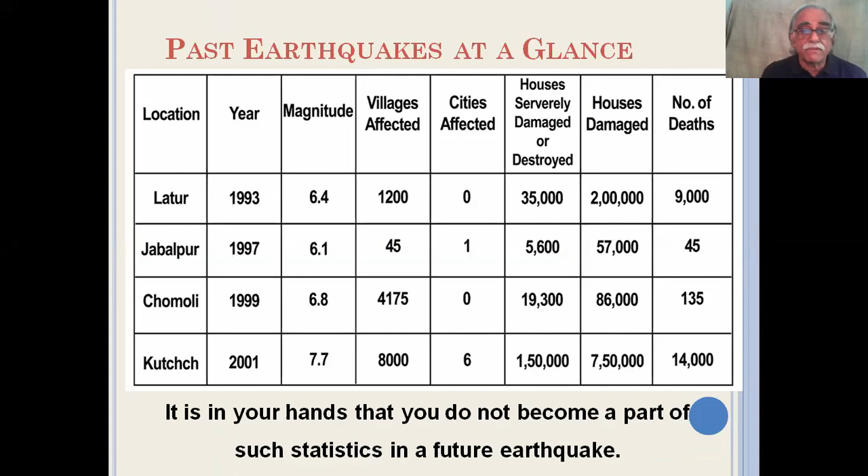These are examples of a few retrofitted schools. When we look at the numbers of damage, destruction, and deaths from the last several earthquakes and other disasters in the country, we find these numbers are huge, and they also mean that funds meant for development get transferred for reconstruction. Looking at the different hazards we have, such as seismic, high-speed wind, and flood, buildings which are vulnerable to a particular hazard are likely to suffer damage and pose danger to occupants if that hazard strikes.

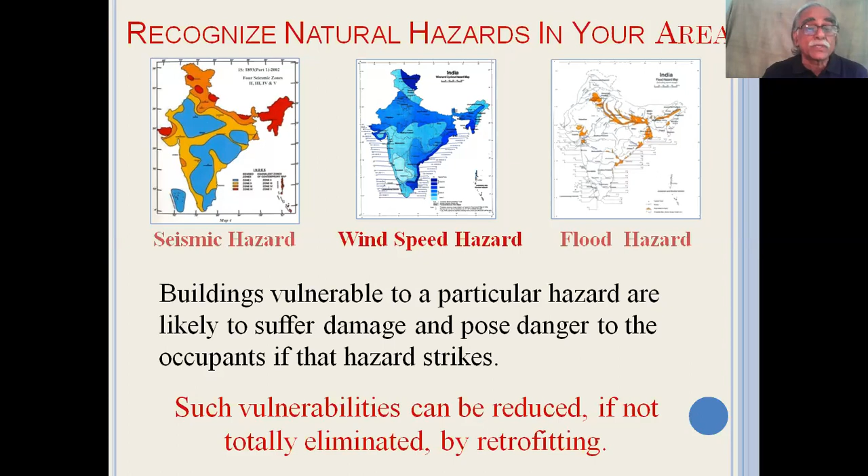Such vulnerabilities can be reduced, if not totally eliminated, by retrofitting. In India, we have lakhs of unengineered masonry and reinforced concrete frame buildings that are vulnerable, as they violate the basic rules of construction and lack disaster resisting features.

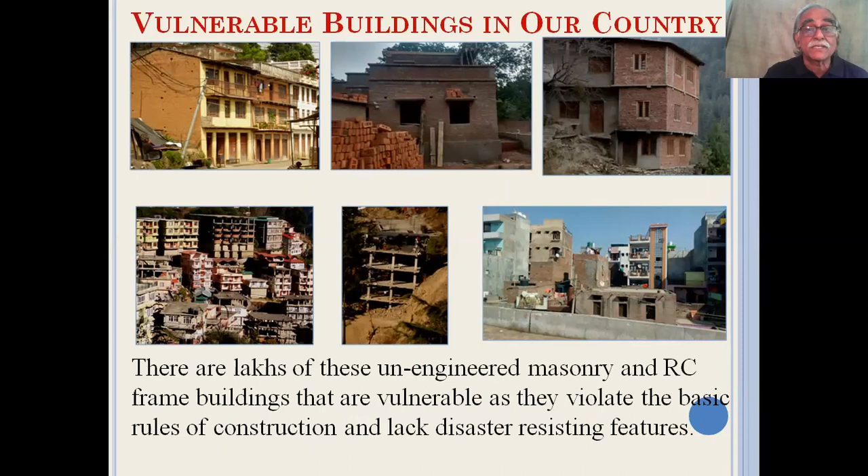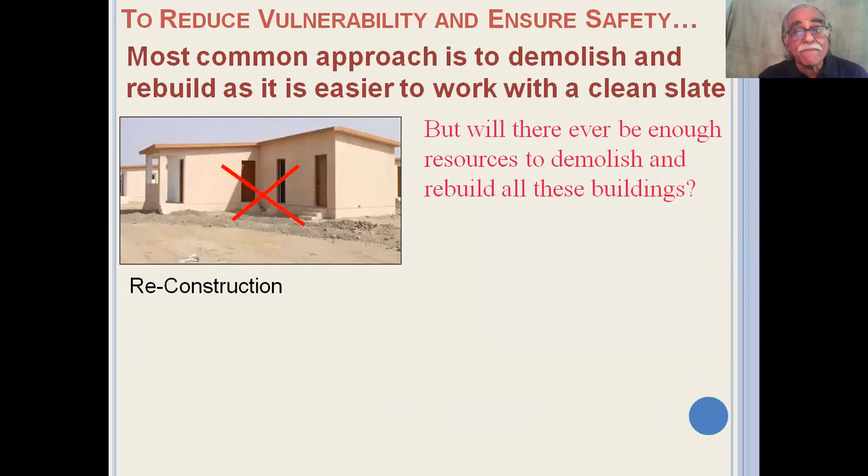To reduce vulnerability and ensure safety, the most common approach has been to demolish and rebuild, as it's easier to work with a clean slate. But the question is, will we ever have enough resources to demolish and rebuild all these buildings? Would it be better to restore and retrofit so that scarce resources can go much longer?

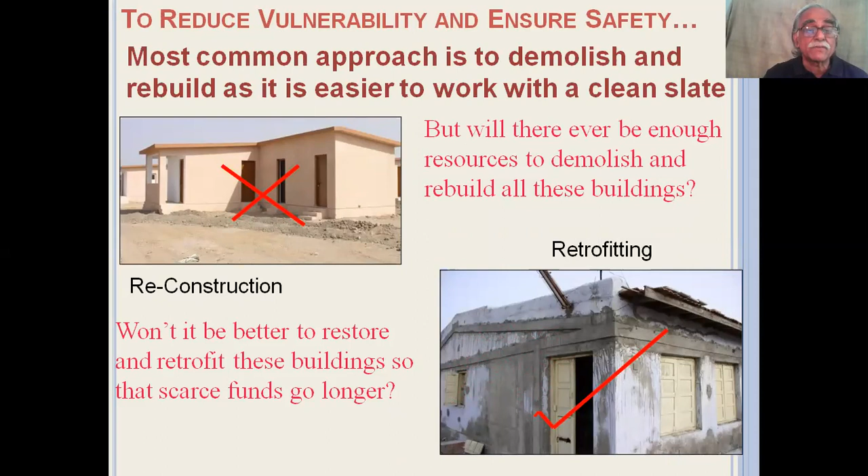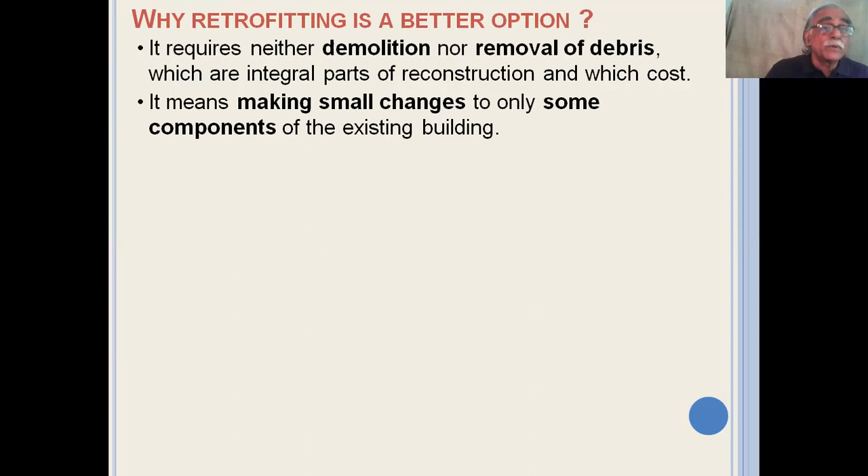Why is retrofitting a better option? Number one, it requires neither demolition nor removal of debris, which are integral parts of reconstruction and cost a lot of money. Number two, it involves making small changes only to some components of the existing building, which means it's 5 times cheaper and faster than reconstruction.

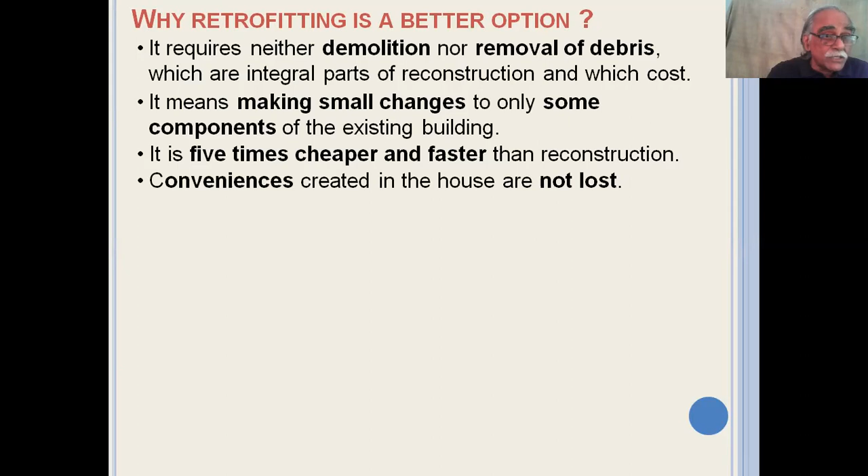Conveniences created in the house or building are not entirely lost, and it can be done in phases and an incremental manner, so it becomes more manageable in terms of resources and time. In today's day of global warming and climate change, this is the most important attribute - it's the greenest option for reducing vulnerability.

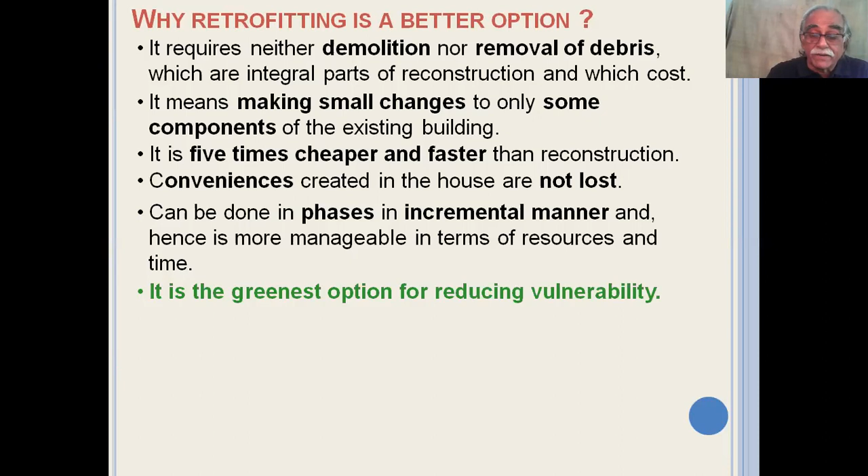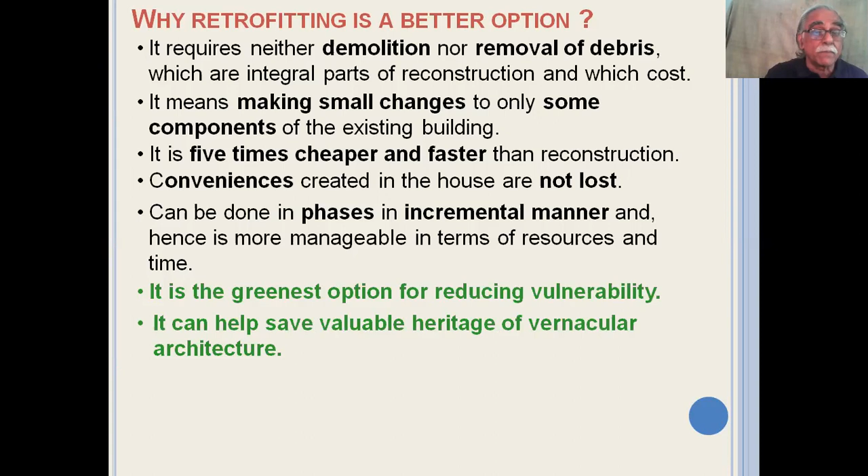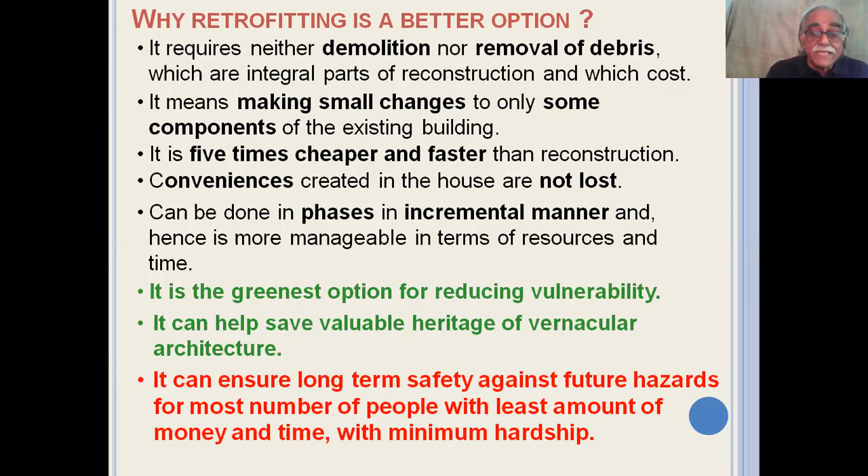Retrofitting can also help save valuable heritage of vernacular architecture, since people will not have to demolish their old buildings. Finally, this can ensure long-term safety against future hazards for the most number of people with the least amount of money and time, with minimum hardship.

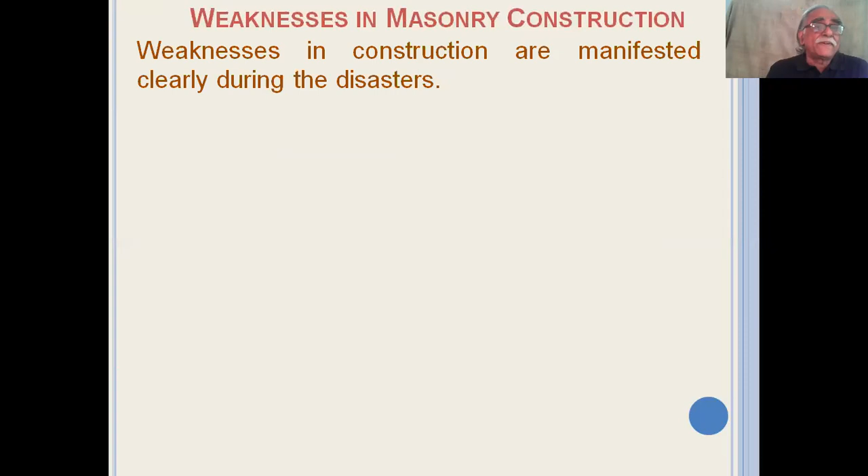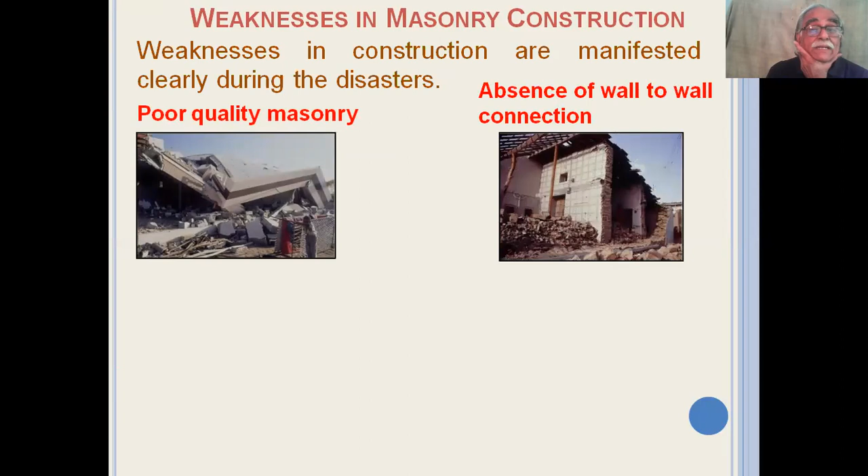Looking at the weaknesses in masonry construction, they are best manifested during a disaster. The picture on the left implies the masonry is poor, and the picture on the right clearly shows that the wall-to-wall connection simply did not exist.

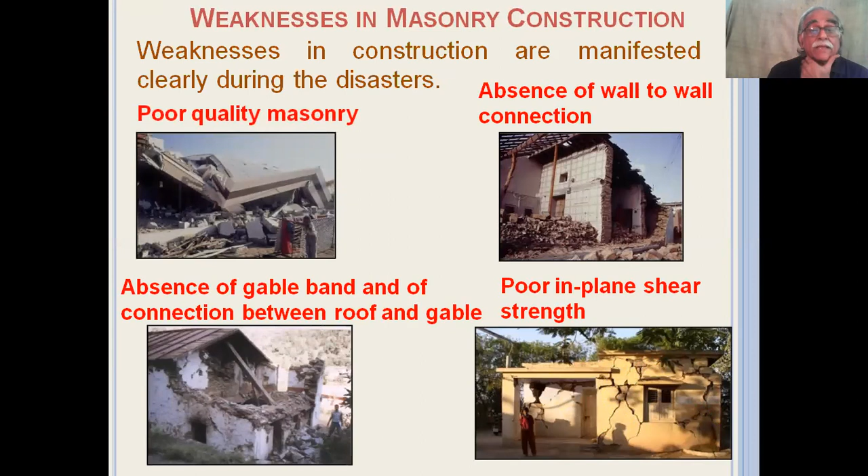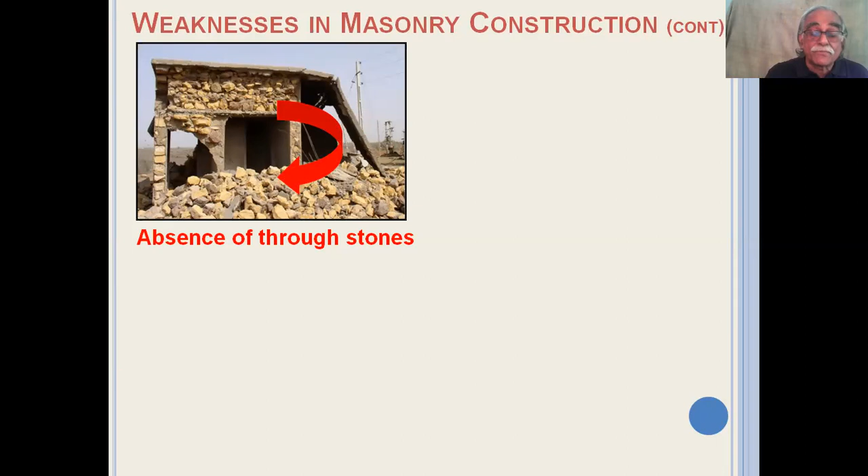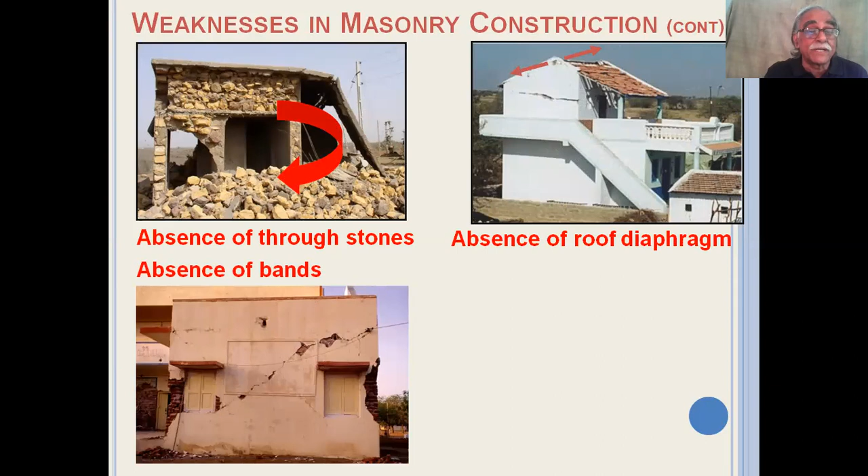The diagonal crack like this also indicates that the bands are missing, and a cracked column of masonry simply says that reinforcement is not there.

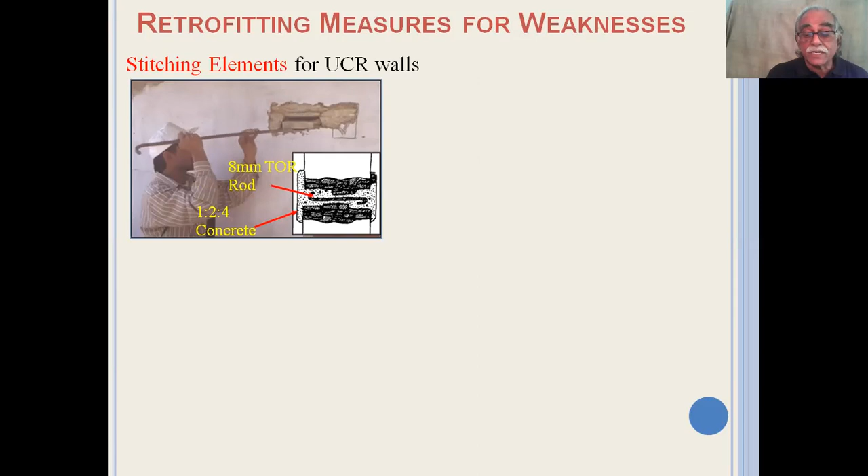For each weakness, there is a retrofitting measure. For random rubble masonry, one can install a cast-in-situ stitching element so delamination does not take place, and install seismic belts at different levels. For vertical reinforcement, splints can be installed on the wall corners.

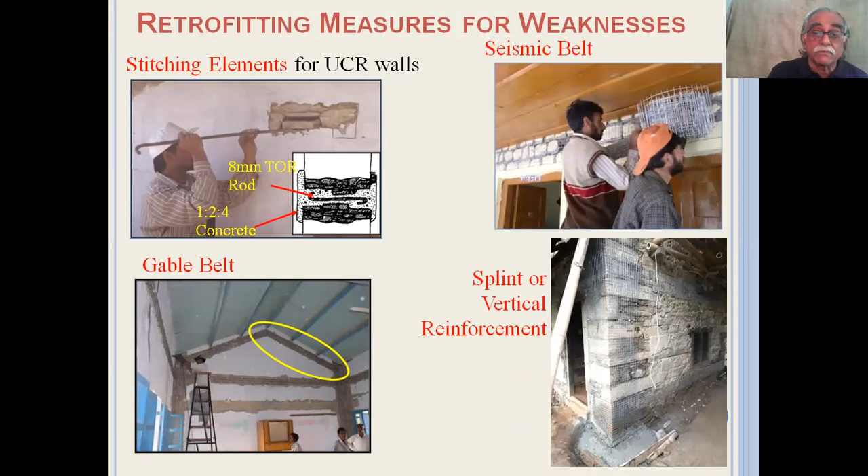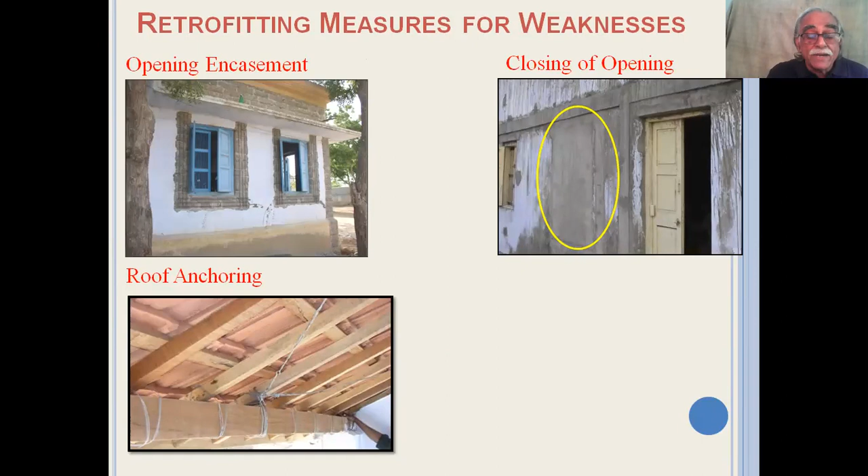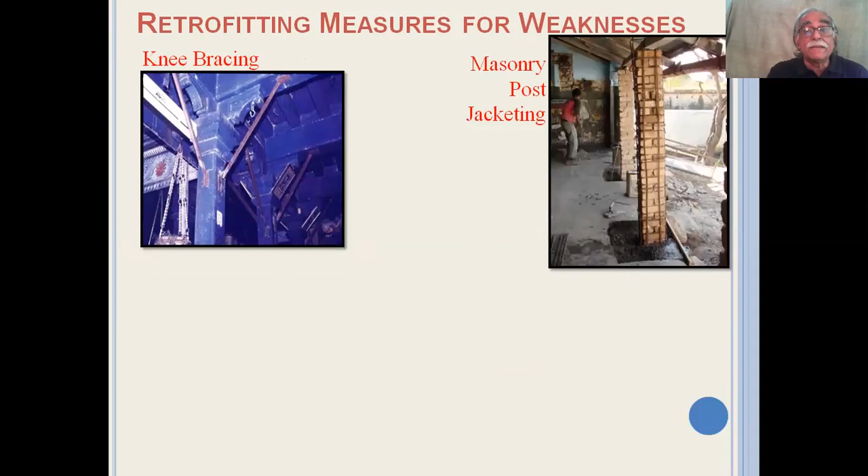Openings can be encased with weld mesh, and if there are too many openings, even a few can be closed. The roof can be anchored using GI wires or other simple means, and similarly RCC slabs can also be anchored to the wall. Timber frames can be strengthened using knee braces, masonry pillars can be jacketed, and roof diaphragms can be created by installing diagonal bracings.

We have retrofitted over 800 masonry buildings in the last 26 years in seismic zones 3, 4, and 5 of the subcontinent. It all started back in the Latur earthquake, then came the Chamoli earthquake in Uttarakhand in 2000, then the Kutch earthquake where we worked in Ahmedabad and large parts of Gujarat, then the Kashmir earthquake with interventions in 2006 and 2007, then interventions in Delhi and UP, and finally the Nepal earthquake of 2015.

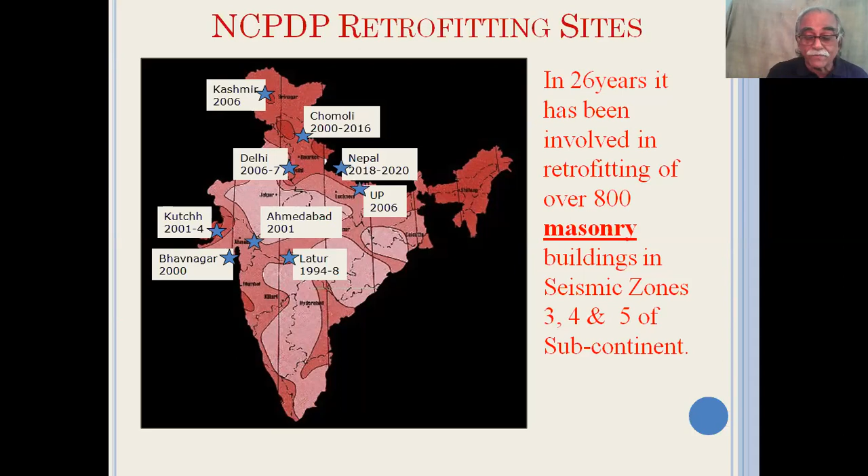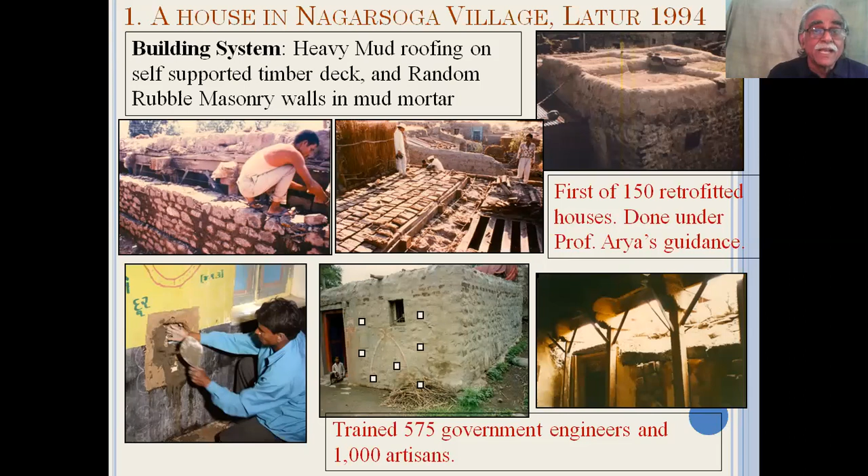In Latur, we retrofitted 150 houses with the house owners' funds, done under Professor Arya's guidance. It involved retrofitting heavy mud roofing supported on random rubble masonry mud mortar. Along with this, we trained 575 government engineers and 1,000 building artisans. In Gujarat, after the Kutch earthquake, we were party to retrofitting 550 infrastructure buildings of different types of masonry.

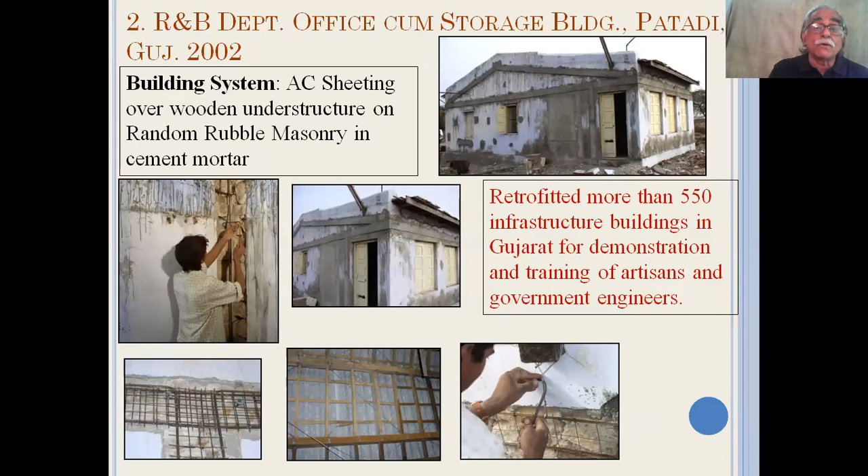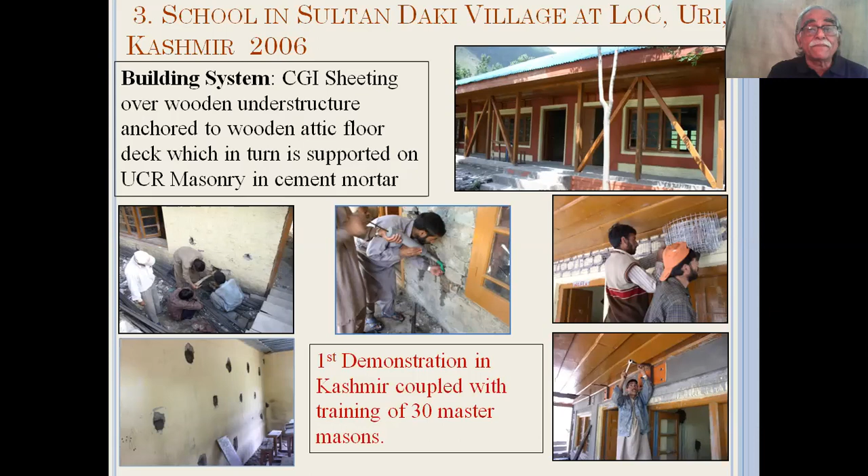And these involved also training of artisans and government engineers on a large scale. In Kashmir, we did the first demonstration retrofitting of random rubble masonry with tin roof, and along with that, we trained 30 master craftsmen.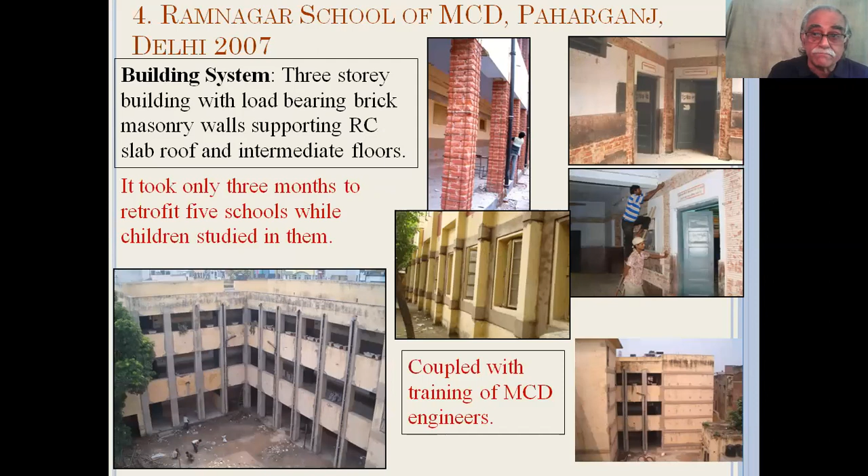And in Delhi, as a sort of a pre-disaster intervention for Government of India, we retrofitted 5 masonry schools, which were up to 3 stories high, built with brick masonry and cement mortar. These were coupled with training of Municipal Corporation of Delhi engineers.

Also in Kashmir, we retrofitted a large subdivisional hospital, done with the help of a class 1 contractor that we had to train. Most interestingly, it took only 2 months to retrofit this huge building, even though the outpatient department did not permit us to work inside the building until 2 p.m. in the afternoon.

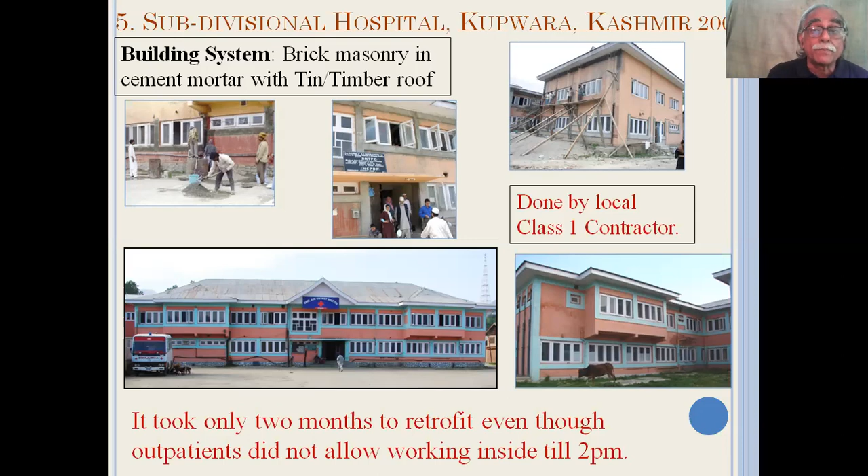Finally, in recent years, we evolved a containment reinforcement system to retrofit brick and stone masonry in mud mortar up to 2.5 stories high using GI wires and welded wire mesh. This too was accompanied with training of a large number of engineers and artisans.

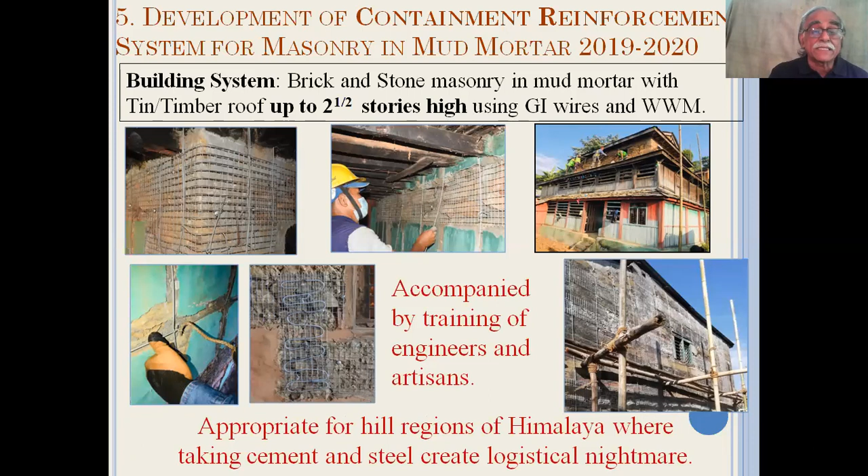This particular option is appropriate for the hill regions of Himalaya, where taking cement and steel creates a logistical nightmare.

I would also like to show the buildings which have been demolished instead of retrofitted, such as school buildings back in Kashmir. A number of school buildings were damaged, but they could have been easily retrofitted, yet they were ultimately demolished. Same way in the 2013 Uttarakhand Kedarnath tragedy, a large number of school buildings which were only lightly damaged were scheduled for demolition instead of retrofitting.

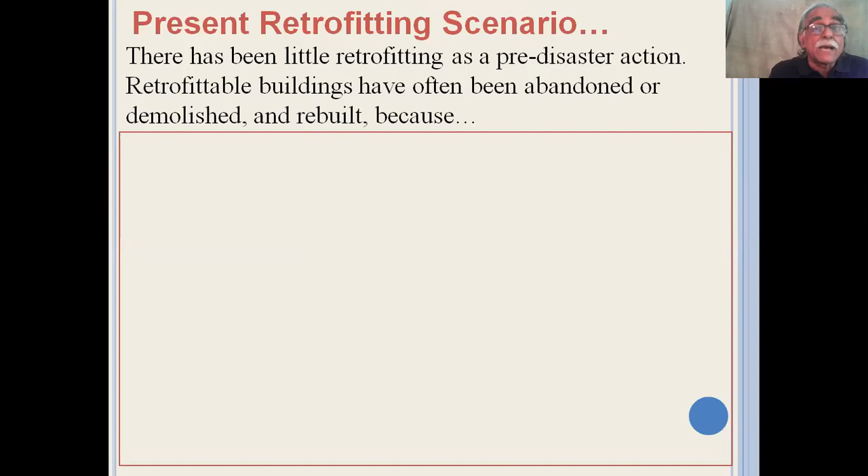Now, the present scenario of retrofitting shows that there has been very little pre-disaster action, and retrofittable buildings have been abandoned or demolished and rebuilt primarily because, number one, most engineers, who are the principal actors, are ignorant about it, and find it more painstaking, and hence don't recommend it.

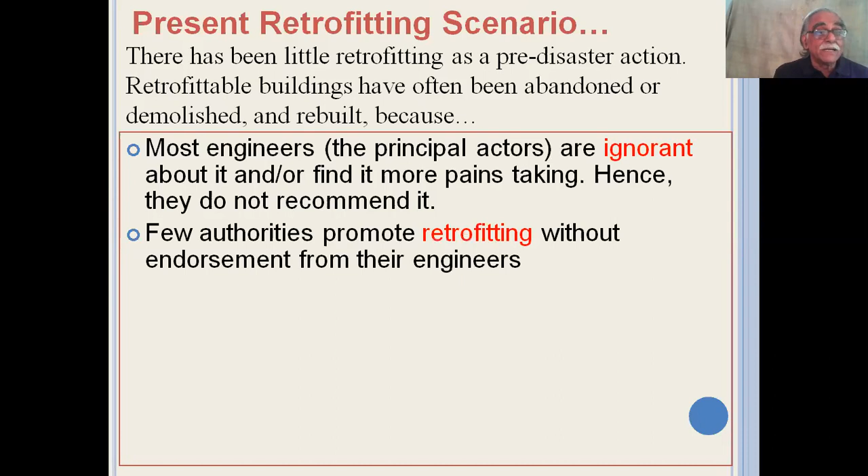So few authorities promote retrofitting without the endorsement of their own engineers. People do not readily accept retrofitting as they find it rather abstract. Contractors and masons are ignorant about retrofitting. Building professionals find it economically unattractive, too much trouble for them. So in short, the retrofitting delivery system does not exist.

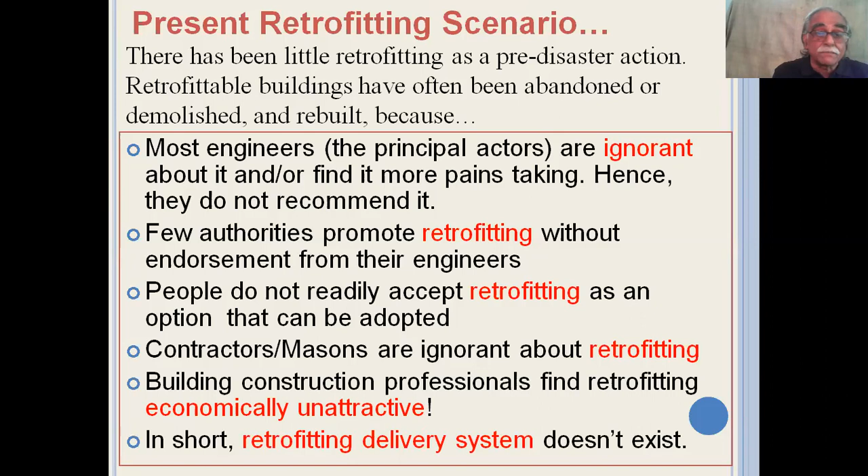Now, when it comes to know-how and guidelines, IS 13935, the Bureau of Indian Standards for Repair and Seismic Strengthening of Buildings, has been there for a long time, and we have extensively used it.

Through on-ground execution of retrofitting of local masonry variants, for demonstration as well as hands-on training of artisans and engineers, we have been able to produce a number of manuals and guidebooks, which started in Latur, then came Kashmir, then Himachal Pradesh and Uttarakhand, and finally Nepal.

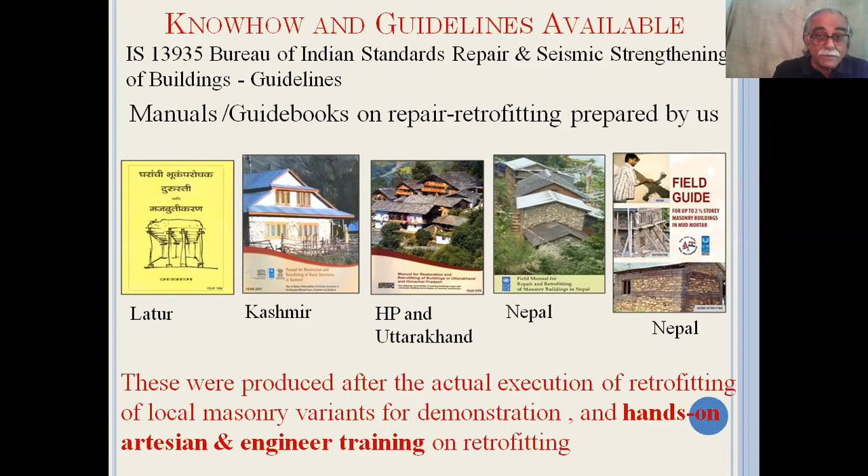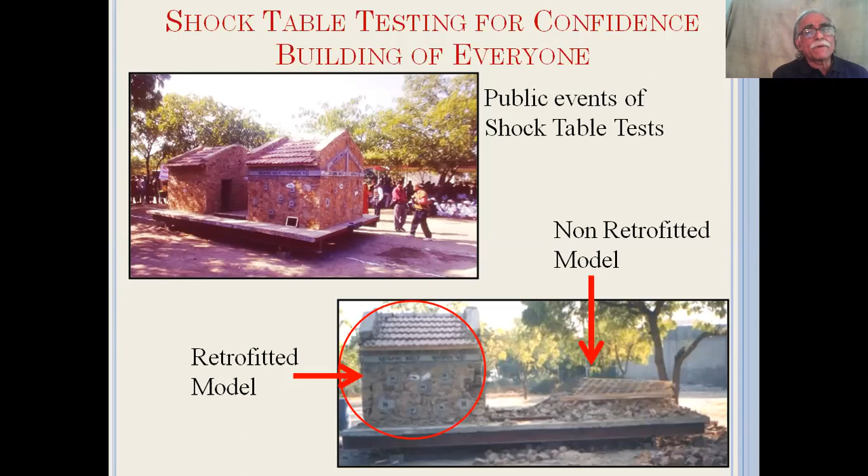All these things were accompanied with awareness programs in the communities via meetings, video shows, poster shows, street plays, and also confidence building exercises. This was done using a shock table, and a lot of them were public events. We also made videos which were later used for confidence building.

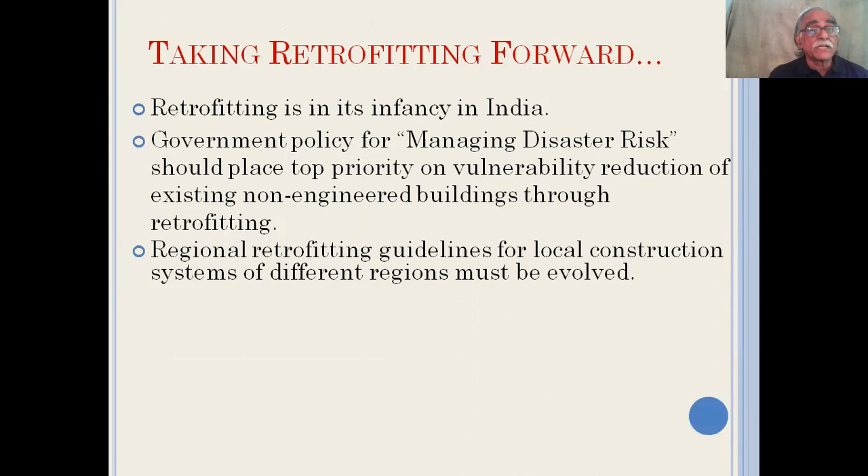Now, taking retrofitting forward, retrofitting today is in its infancy, we must understand that. So government policy for managing disaster risk should place top priority on vulnerability reduction of existing non-engineered buildings through retrofitting. For this, regional retrofitting guidelines for local construction systems of different regions must be evolved, and easy to understand information on the subject must be made easily available in local languages.

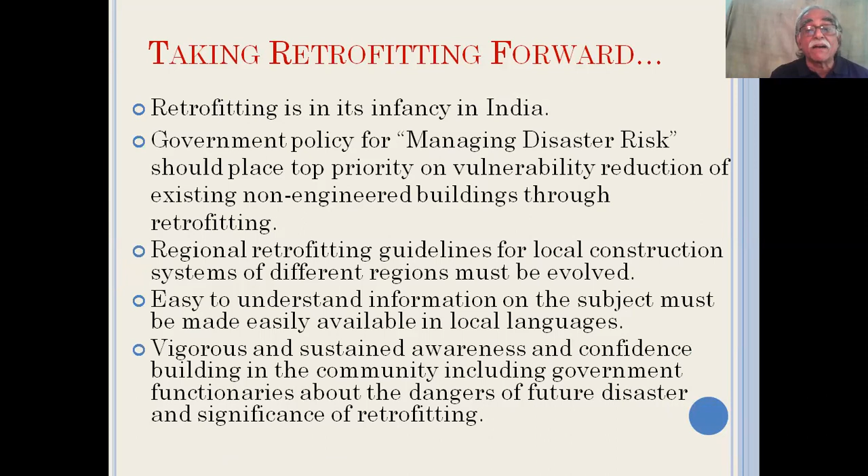This must be accompanied with vigorous and sustained awareness and confidence building of communities at large. Along with this, public agencies owning buildings must be sensitized to assign due priority to retrofitting their buildings. Materials required for retrofitting must be made available.

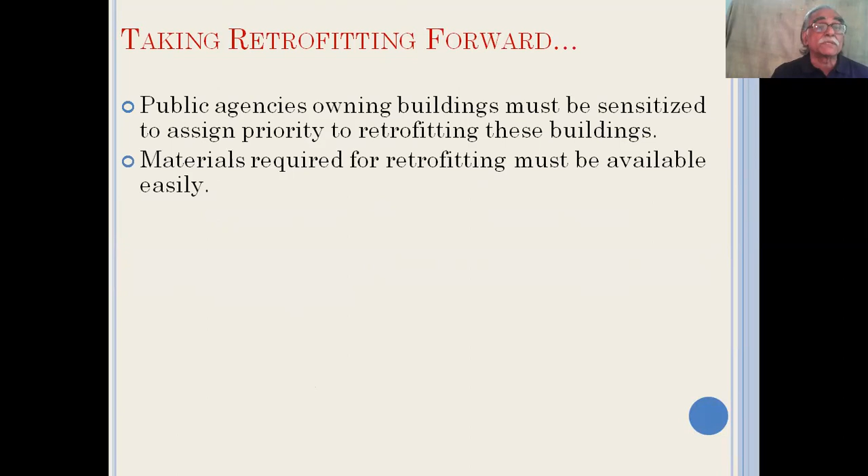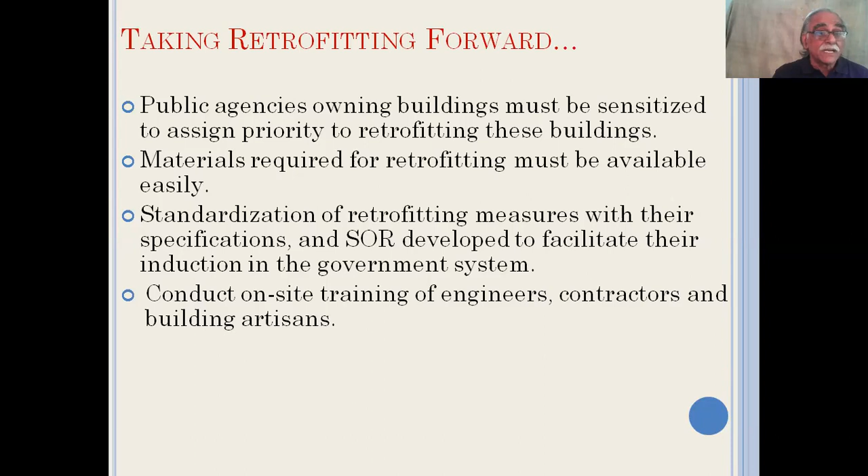Standardization of retrofitting measures needs to be done, and a schedule of rates needs to be developed so it can be inducted into the government system. We need to conduct on-site training of engineers, contractors, and building artisans in retrofitting, so that retrofitting skill becomes easily available in the market. Finally, through all this, we create the retrofitting delivery system.

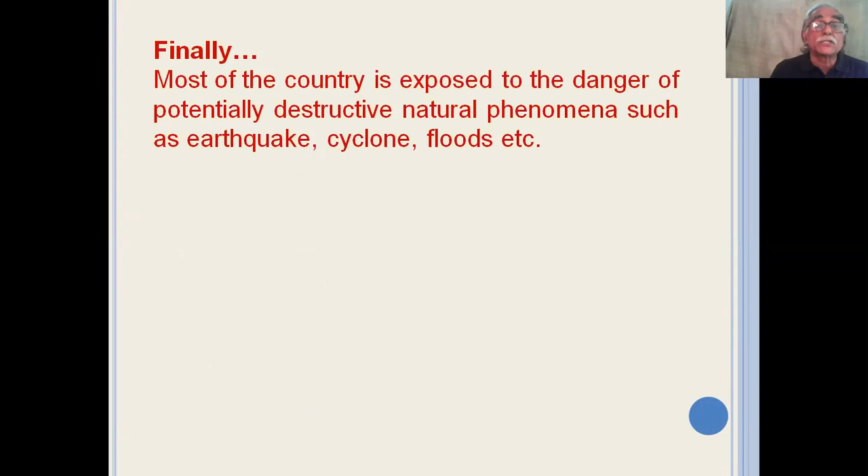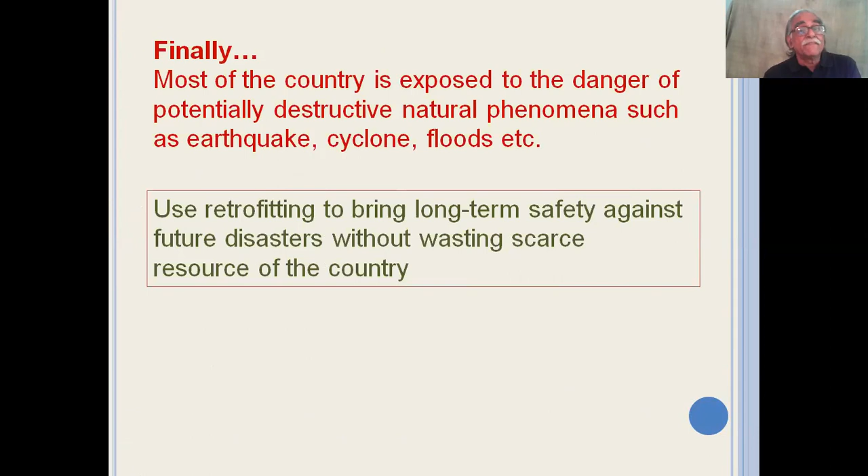So finally, I'll say that most of the country is exposed to the danger of potential destructive natural phenomena such as earthquakes, cyclones, and floods. We need to use retrofitting to bring long-term safety against future disasters without wasting scarce resources of the country. Ideally, it will be best to retrofit lifeline facilities first, such as schools, hospitals, police stations, government offices, to set the precedent and simultaneously create the delivery system.

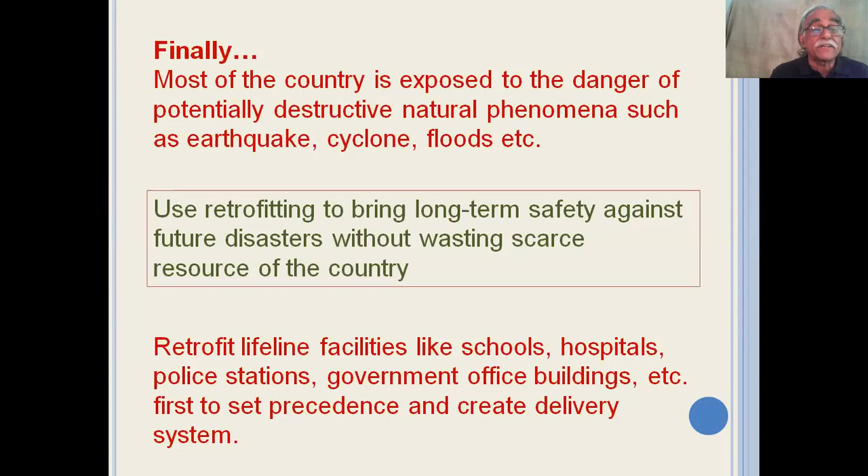So I'll end by saying that, as the saying goes, best is the enemy of better. Instead of full retrofitting, even partial retrofitting that the funds permit will reduce vulnerability and bring safety. Thank you.